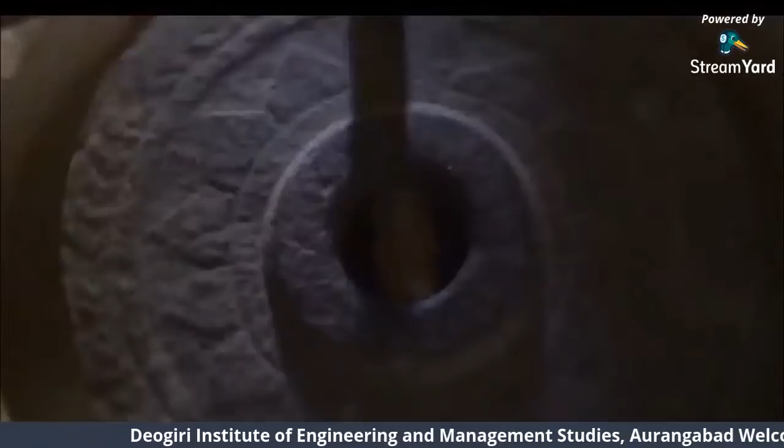The Anand Group. As India's leading auto component manufacturer, we power just about every type of motor vehicle - cars, commercial vehicles, off-highway vehicles, two-wheelers, and even trains that run in India.

There is an ever-growing demand for stringent quality norms from our key customers. The customer expectation, along with a strong competitive environment, has brought in the need to attain and sustain world-class quality levels.

Mr. Deep C. Anand, the founder of Anand, firmly believed in the ethos that in order to be the best, you have to work with the best. The group's journey of partnerships began with Gabriel in 1961. Over the past 6 decades, Anand companies have successfully integrated the technical expertise of its joint venture partners into local operations, creating win-wins for both our customers and our companies. Today, the Anand name is synonymous with trust, innovation, and quality.

With its wide range of solutions for the Indian automotive market, Anand companies provide a range of brands and products that are simply world-class.

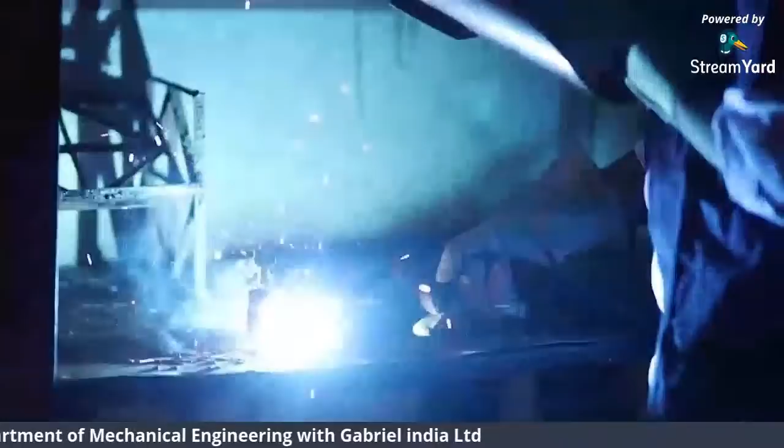It also offers 6 months of industrial training in the final year, enabling students to develop knowledge as per industrial requirements. The institute offers BTech and MTech courses in various disciplines like mechanical engineering, electronics and telecommunication engineering, civil engineering, computer science and engineering, as well as a master's in business administration.

Leaders become great not because of their power, but because of their ability to empower others.

Creative learning, personal attention, individual counseling, and valuable guidance open up a world of new ideas, which infuse the motivated students and staff with positive energy and creative thoughts.

This can be expressed as a unique equation: DIEMS is equal to discipline plus academics plus placements.

Why DIEMS? There are more than 40 spacious and well-ventilated classrooms which provide a healthy environment for innovative classroom learning.

More than 60 well-equipped laboratories with best-in-class equipment meet not only the requirements of the syllabi, but are also intended to give practical experience to students. The students here enjoy the fun of performing various scientific experiments. Playing with various circuit components and seeing how they work in real time is the best way to learn. Competent teachers demonstrate the experiments in the labs, and the students get opportunities to explore inside and beyond the classrooms.

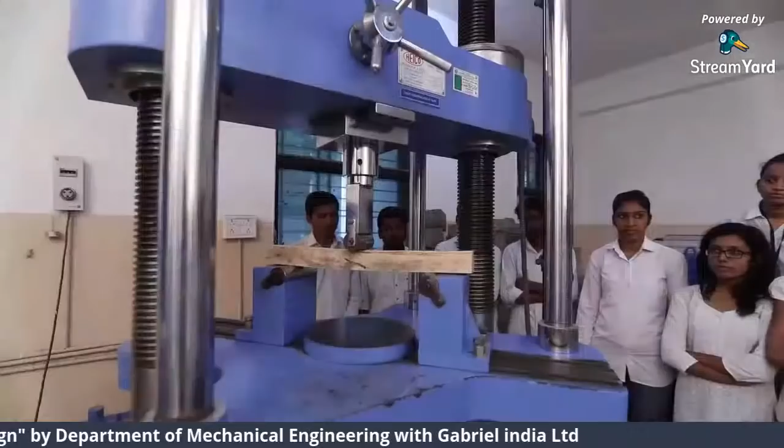These labs provide the facilities for performing practicals on the related concepts of each subject. There are updated software and equipment for the different subjects. Here, the future engineers experiment with, test and prove theorems. Every laboratory aims to prepare students with the knowledge and ability to improve, evaluate, design and control sustainable and cost-effective technologies in order to make innovative and useful contributions to humanity.

In order to ensure that students are well aware of the required industrial standards, not just theoretically but also in practice, we at DIEMS have a fully equipped central workshop. Here, the students are not only informed about the various stages in the making of a job, but they also get a chance to perform all these jobs on the shop floor.

The students complete their projects in the workshop for vehicle manufacturing and assembling of parts. Here, we make sure that our future engineers never miss out on the finest details regarding the various elements of manufacturing.

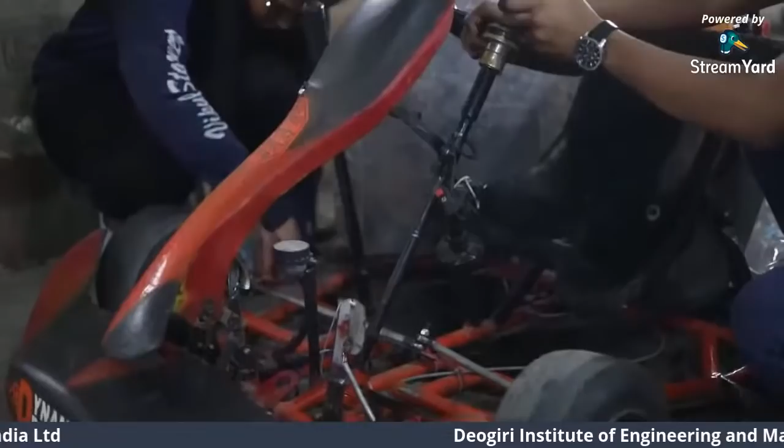The Institute's library is enveloped in a serene atmosphere. It has a spacious reading room and serves the students and faculty with more than 30,000 reference books, periodicals, magazines, newspapers, and journals. Our digital library provides the students with online books and e-journals, articles, video lectures, manuals, and many more. It also provides updates, study material, and databases on a large scale, all of which support the academic curriculum of students.

Our students enjoy the facility of an elegant seminar hall for conducting guest lectures, training programs, and technical events. The spacious conference room is outfitted with presentation technology for conducting conferences, meetings, and presentations. To meet the requirement of activity-based programs, short-term training programs, and technical workshops, 2 distinct seminar halls have been provided.

Understanding the dynamics of industrial expectation at the national and international levels, this year the students have been trained by companies like TCS, TechRel and Barclays. The highest number of job offers was achieved in 2019, with offers from companies like Byju's, Wipro Technologies, Reliance Jio, Atlas Copco India Ltd, Dhoot Transmission, Jaro Education, Hire, Syntel and many others. The highest compensation package offered was 9 lakh rupees per annum.

The girls as well as boys hostels of DIEMS is located in a safe and secure campus, and it is indeed a new home away from home. Strict rules are followed and discipline is not compromised. The mess is a great place where food is cooked to perfection and where the homemade flavors, tastes and affordable prices are a hit with the hostelites.

The canteen is the favorite place for students to relax from their hectic schedules. It is also the best place for students to mingle in groups.

We encourage our students to excel not just in academics but also in sports. Situated in the center of our campus is a vast, lush green playground where students can bring out the athlete in them.

Under the NSS activity, the students take concrete steps to discharge their social responsibility by performing various activities like organizing tree plantation drives and blood donation camps, check dam construction, and conducting street plays. The institute has also adopted a village, Sultanpur, under this initiative and is educating the local people every year about critical subjects like water conservation, environmental awareness, and child education.

The college frequently takes the students on industrial visits to various companies with the objective of providing them exposure to real-world problems and inculcate a practical approach. More than 500 industrial visits have been arranged so far.

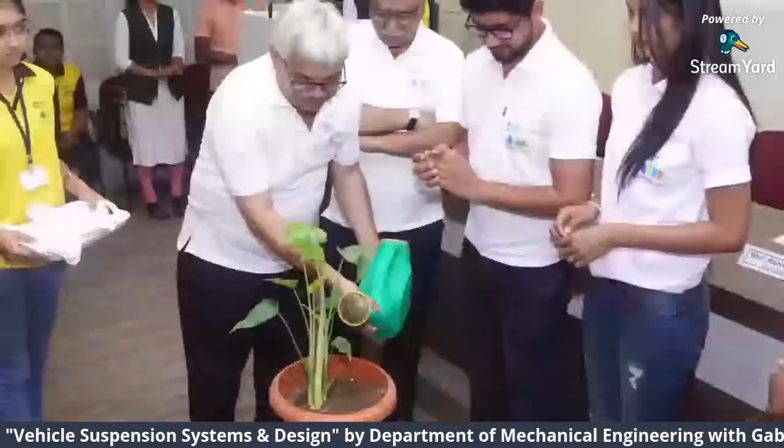The Red Hat Academy helps students differentiate themselves by providing enterprise-ready Linux and open-source advanced training, which develops in-demand skills. More than 150 students have been certified so far, and more than 50 students have got jobs in open-source technologies.

Recently, the Institute had organized the flagship 4th International Conference on Computing in Engineering and Technology. Here, researchers, engineers and scientists from around the world participated and presented their research papers, which were published in the AISC series of Springer. The Institute is well known for its dazzling academic records.

The students have brought glory to the Institute with consistent performances in the university exams by securing top ranks in the merit list and setting new benchmarks every year. We have excelled with flying colors in technical events as well.

Team Dynamic Boosters won the General Championship in the Student Kart Design Challenge Season 2, held at Hyderabad, and also stood second runner-up in the Bharat Formula National Level Go-Kart Championship held at Coimbatore in March 2019.

The all-girls team Tejaswini got the Best Cost-Effective Report Award and Visionary Award in the Saur Urja Vehicle Challenge held in March 2019. Recently, Team Bhumiputra won the Best Innovation Award for the Onion Harvester in the event TIFAN organized by SAE India.

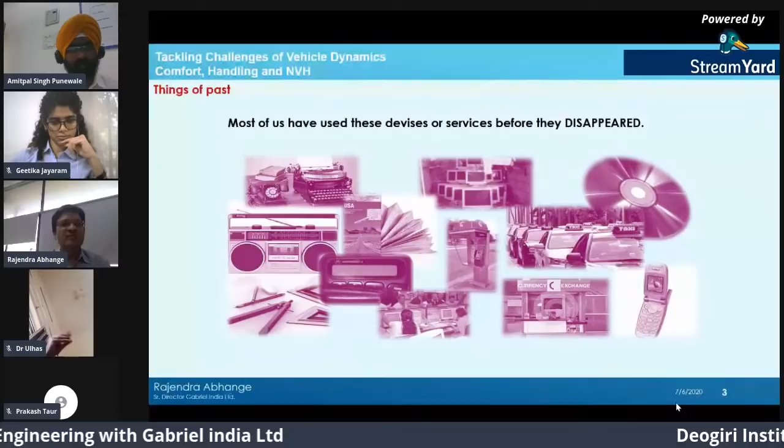It's always my pleasure to be amongst the young students, because whenever I am with you, I believe you have a large audience today. I'm not going to talk about shock absorbers. I'm going to talk about what revolves around shock absorbers for the next 5 to 7 minutes before I hand over to my young team, Ajay and others, who are already here and will take over in a few minutes.

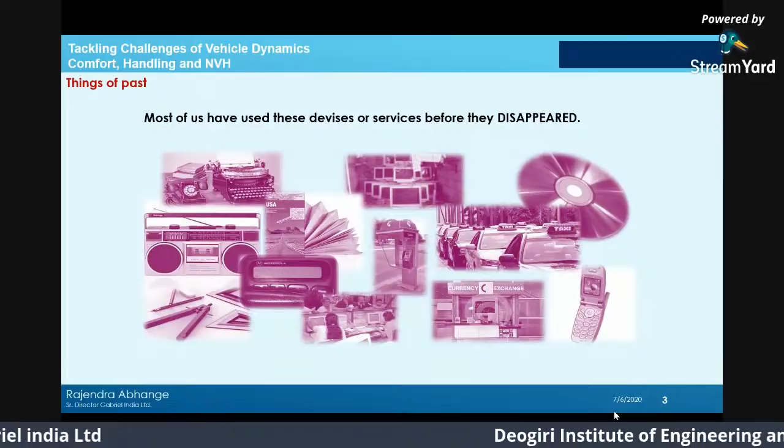I want to take you to a little past history. Most of these gadgets we would have used in our lifetime, but today they don't exist anymore. So what has happened all of a sudden? Have you stopped listening to music? Have you stopped getting documents printed? Are you not talking on telephones or mobile phones anymore? But something has happened.

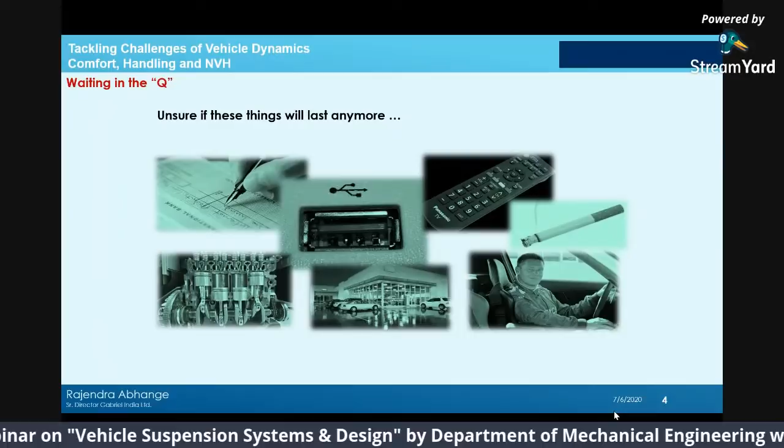Here are some of the devices or services that are likely to not be there, including services like drivers. You may not have the driver. Cigarettes may not exist. Engines may vanish. We all were born with engines, you know. We studied - I am a mechanical engineer from Government Engineering College, Aurangabad, and engines were my favorite topic. But today we are talking about engines vanishing. What an amazing thing. So all these things are going to happen.

So what is behind all this is that when things get obsolete, first of all, there is nothing eternal. There is nothing forever on this planet. Everything has a life. Most of the time, when products are unable to provide an attractiveness in cost-value relationship compared to other options, the product vanishes. For example, the cassette player - it was not able to provide the cost-value relationship compared to the new generation of listening to music.

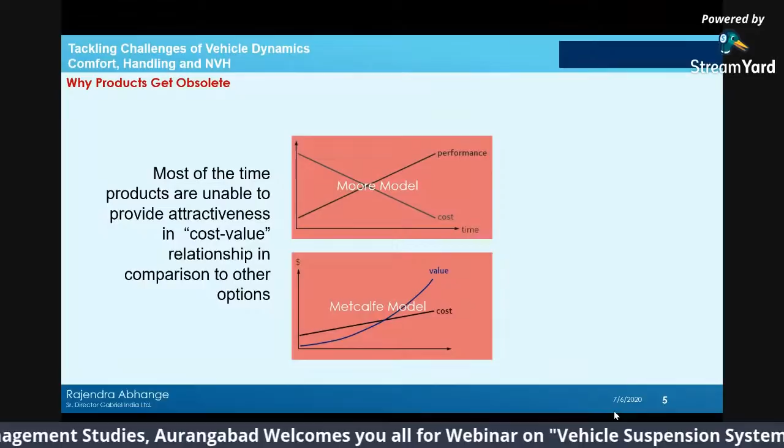First FM came, then CD players came, then iPods came, and now everything is gone and everything is in your mobile. Smartphones came. So things don't remain forever, but the way you use things changes. That, in economic language, is called the cost-value relationship.

Moore is one of the scientists, and Metcalfe is another, who put forward two theories: that if you are continuously enhancing the performance of your product linearly, the cost has to go down linearly. It's a very radical thinking, isn't it? Normally you go to the market and ask for something superior, a better shirt, and they say it's going to cost you more. But Moore said, if you want to stay alive in the marketplace, you have to enhance performance while reducing cost continuously, and the relationship has to be linear upward and linear downward.

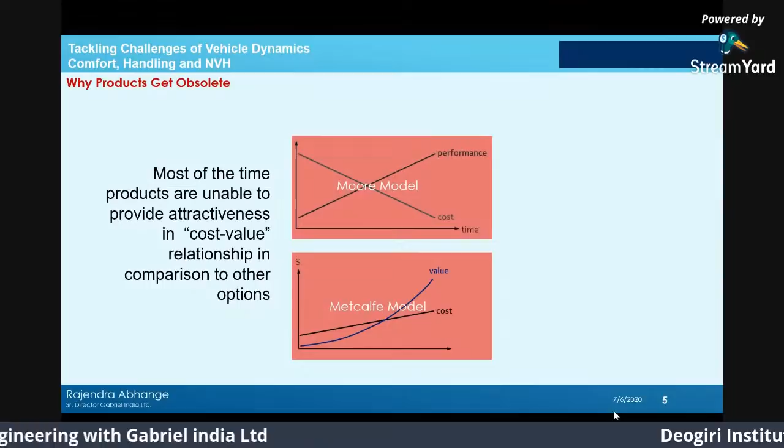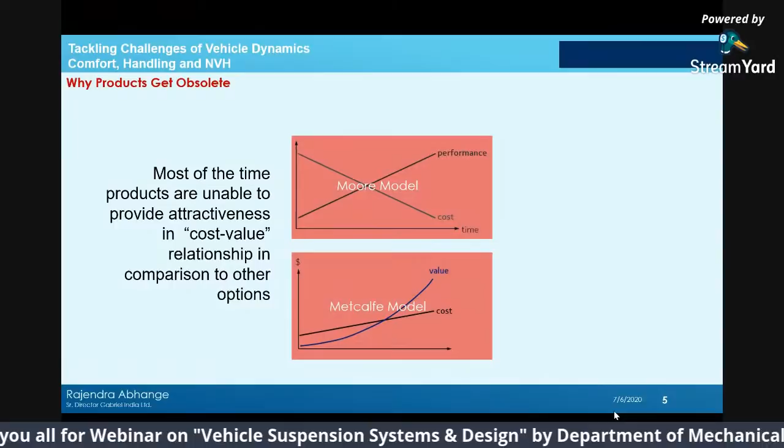On the other hand, Metcalfe brought another model - that it's okay if sometimes the cost of the product goes up, but then the value has to go up exponentially high. Then you stand a chance to survive. Gabriel has been following these models for over 5 or 6 decades now, and that's why we are the oldest company in India that still survives in shock absorbers. Otherwise, many companies have come and gone. We stay alive because we follow both the Moore model and Metcalfe's model in our business, so that our products are continuously demanded by the market and don't get obsolete.

Another topic - this is a chart from IBM, showing data for the last 10 years. It's available on the net, showing the external forces that are going to impact our industry. Technology continues to be one of the major topics that impacts the industry, but look at the other indicators. Sustainability was only 33% as an index in 2008, and has gone up to 60%.

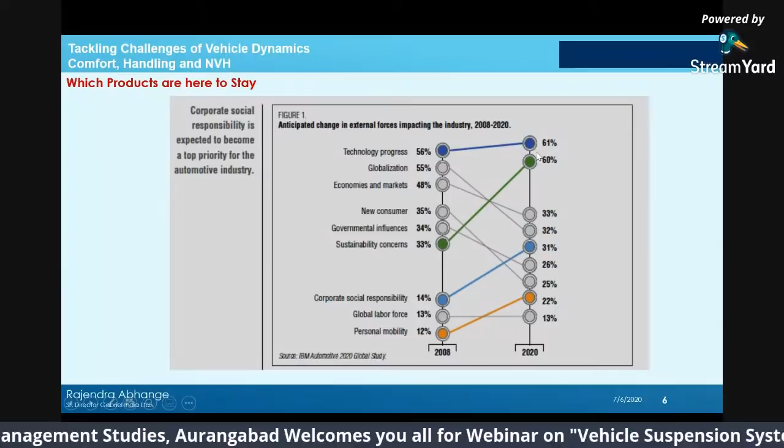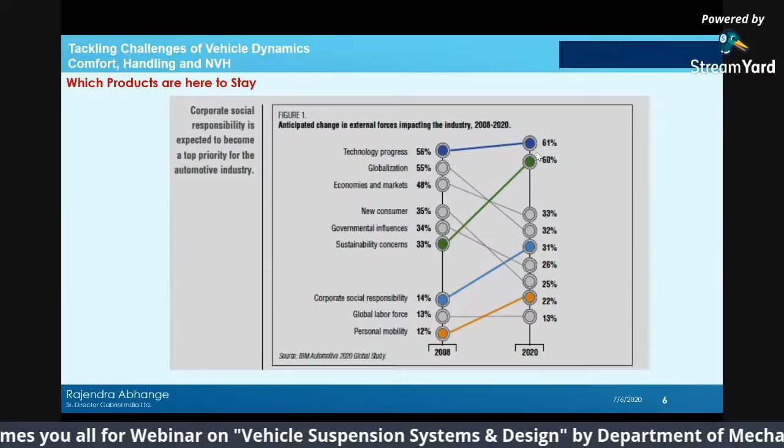That all means carbon footprint, reduction of weight, reduction of wastages, reduction of poisonous emissions - everything counts in the future. If your products are associated with these kinds of hazards, believe me, your business, your products will not exist anymore. Why has BS6 come? Everything that was produced in BS4 is no longer possible to sell. There are trucks and cars lying in the yards with dealers who do not have buyers because they do not meet the new BS6 norms. So remember, in any business or service you are in, if you are not able to handle the sustainability concerns, your product is under threat.

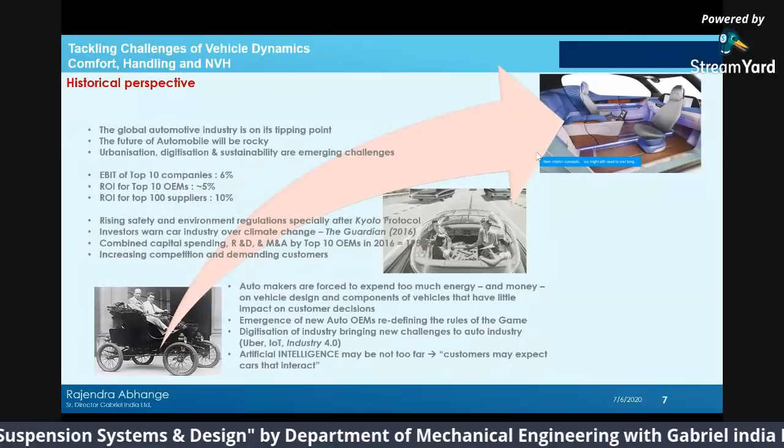Automobiles have evolved over the years, right from the first automobile in 1905 and 1908. The first automobiles were built and Ford did mass production of that. From that time to today, there is a huge change. In those years, people preferred horses over automobiles because automobiles were a bigger problem - they were not fast enough and consumed a lot of fuel, not very economical. Horses were very handy, they would go to any nook and corner. So people said this automobile is a useless thing to have, and horse is a better thing to have.

But today you see where we stand, and looking at the way forward, you will see a future which will not have a steering wheel, which will have nothing inside - just like you're sitting in your living room or bedroom. You will have all the gadgets because cars will be driverless. I just got a call last week from an old colleague in Silicon Valley - there is a company called Nuro that has already got a license for a delivery truck which is driverless, has no driver, and can run on the normal road. So these are some of the disruptions happening around us, and we have to be a part of this disruption.

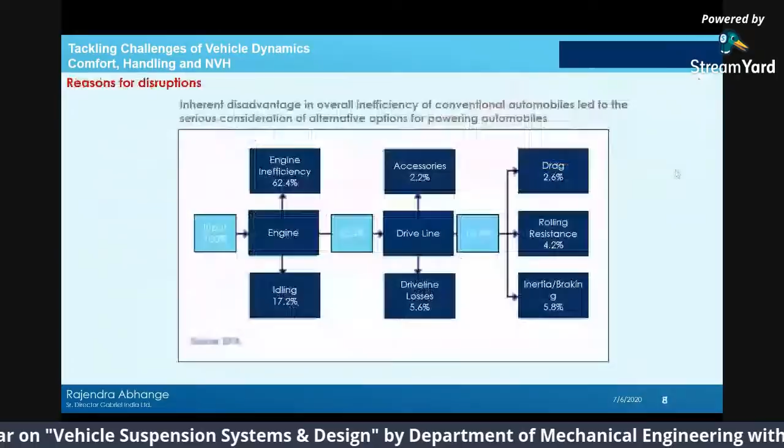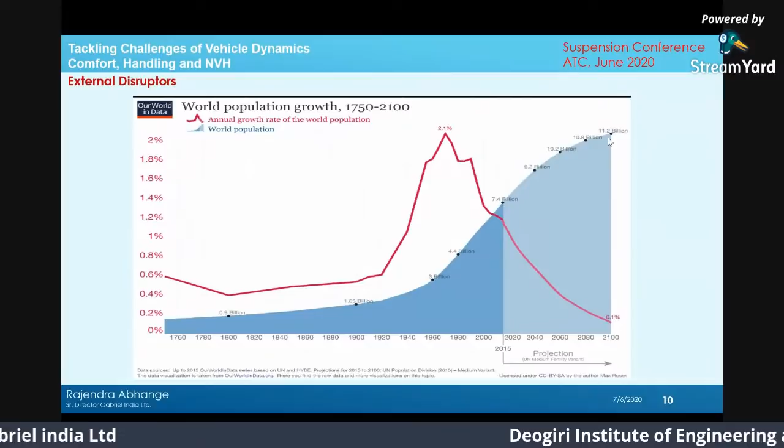Also remember that the world's aging population is continuously growing, so the demand is going to continuously grow. Today we are at 8 billion - sorry, I'm showing a wrong slide - today we are somewhere around 7.4 billion, by 2020. This population by the end of the century will be 11 billion. Obviously the demand will be more, and the consumption of everything we produce on this planet is going to go up.

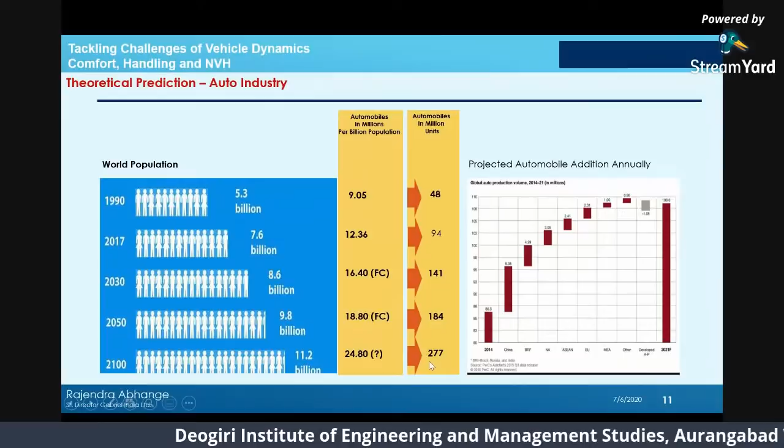Also the automobile requirement is going to go up. India currently has only 30 cars per 1,000 people, or less. China has 150, America has 800. So if we are able to get even to the level of China, around 150, India's roads will burst with automobiles. There will be no roads to travel, there will be no roads to park the car.

So all these disruptions happening around us, including the mobility index - the global mobility index is going to be another topic where people would like to have more mobility options. Like in Aurangabad, you only have city buses and auto rickshaws, you don't have so many Ubers, trams, or metros, so your mobility index will fall very low on this scale. But cities like Stockholm, Amsterdam, Hong Kong have multiple ways - in Hong Kong you can go by ferry, tram, sky train, metro, or drive. There are n number of options to commute these distances. So the global mobility index is also going to be a huge topic which is going to disrupt the entire auto industry.

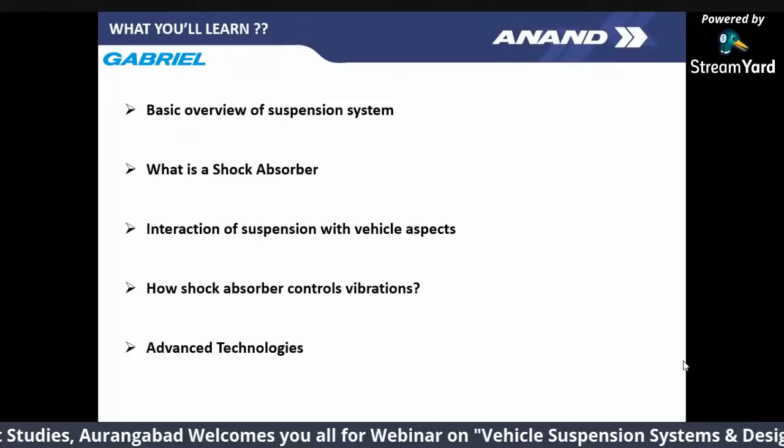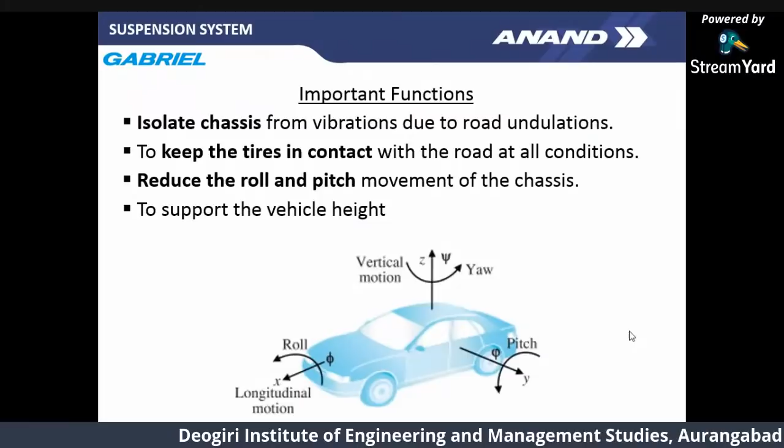What are the important functions of the suspension system? The main function is to isolate the chassis from the vibrations which come onto it due to road undulations. Next, to keep the tires in contact with the road at all running conditions, to reduce the roll and pitch movement of the chassis, and to support the vehicle height at all conditions.

What are the different types of suspension system?

Next, moving on to independent suspension. In independent suspension, each wheel can move independently of the other. Their motion does not depend on the adjacent wheel. This independent suspension improves the vehicle's ride control as well as comfort.

The most commonly used types of independent suspension in four-wheelers are Macpherson Strut and double wishbone type of suspension. It is needless to say that in two-wheelers, both wheels move independent of each other, hence it is also an independent type of suspension.

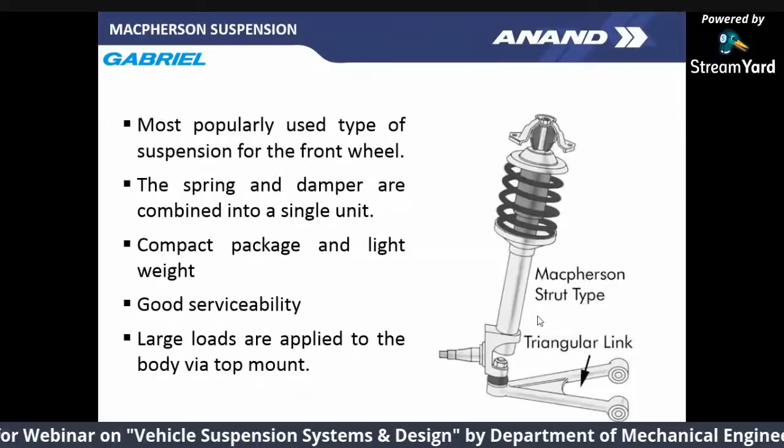So moving on to the most popularly used type of suspension in the front wheel of a four-wheeler: the Macpherson Strut. In this, as you can see in the figure, the damper as well as the spring are combined into one single unit. As both are combined together, the package is very compact and light in weight. As there are fewer parts, you only have the triangular link, which is the lower control arm, and the Macpherson strut present. It gives you good serviceability.

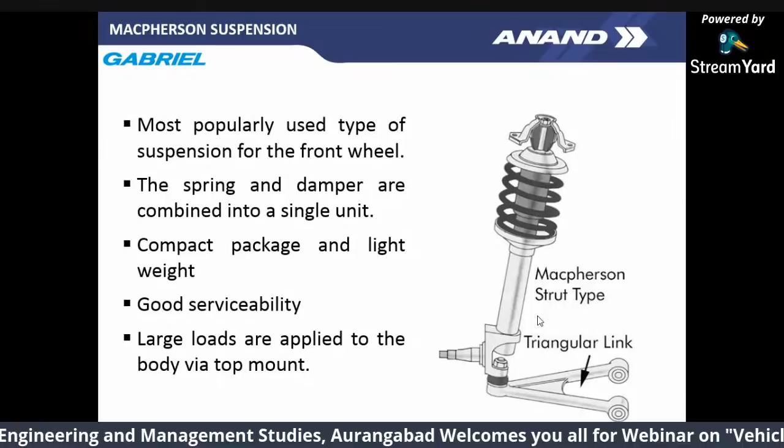In double wishbone type of suspension, there is another wishbone present just to carry the loads. In the McPherson strut case, that is absent, so the strut itself becomes a load carrying member. Hence, large loads are applied on the body via the top mount of the strut.

Next is the double wishbone type of suspension. Here, as you can see, there are two wishbones, the upper and the lower one. The damper is connected to the lower wishbone, and this is connected to the chassis at four points. Here also, the spring and damper are combined together into one compact unit.

But as you can see, there are more parts. Hence, the replacement and service costs are high. It's more complex in shape and higher in weight as well compared to the McPherson Strut.

If we go on to two-wheelers, in front suspension, you have the telescopic front fork. It is the most commonly used type of front suspension in two-wheelers. It contains the damper and the spring packed as one single unit. Most of its advantages are that it is very simple in design, easy to manufacture and assemble, and lighter than the older designs used in two-wheeler front suspension, which consisted of many linkages and external components.

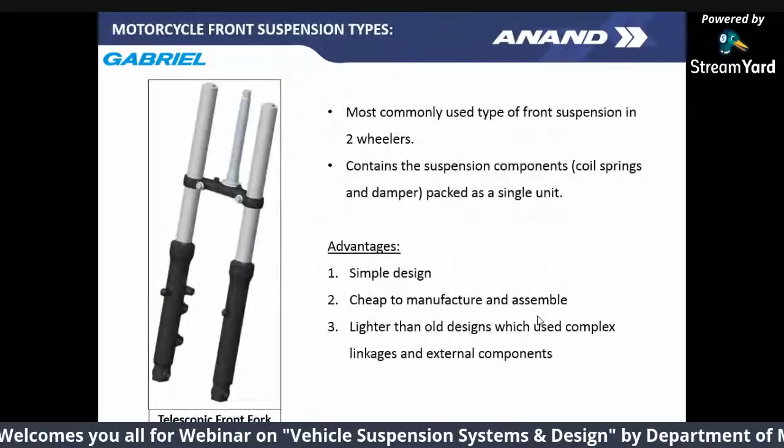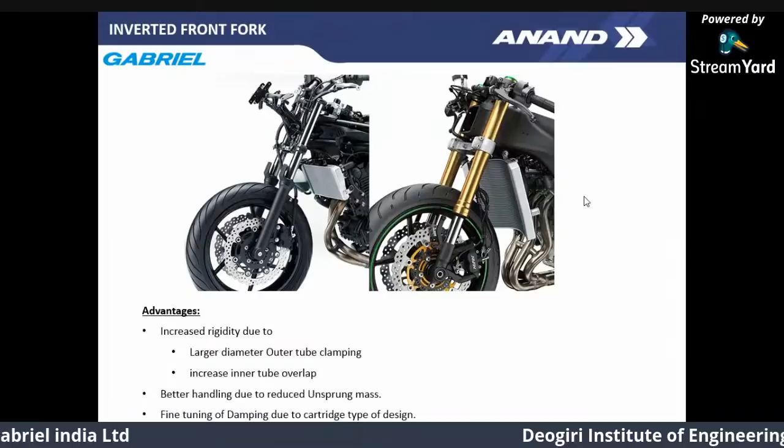We will get to the concepts of unsprung mass and sprung mass and their effect on the vehicle in later stages, as well as fine tuning of damping due to cartridge type of design.

Now you could see that in all cases, the shock absorber was common. So what is the shock absorber exactly? It is a hydraulic pump-like device, mainly used to control the impact and rebound movement of the vehicle. The key role of the shock absorber, as with the suspension as a whole, is to maintain the vehicle's tire always in contact with the road. This ensures the safest control and braking response from your car.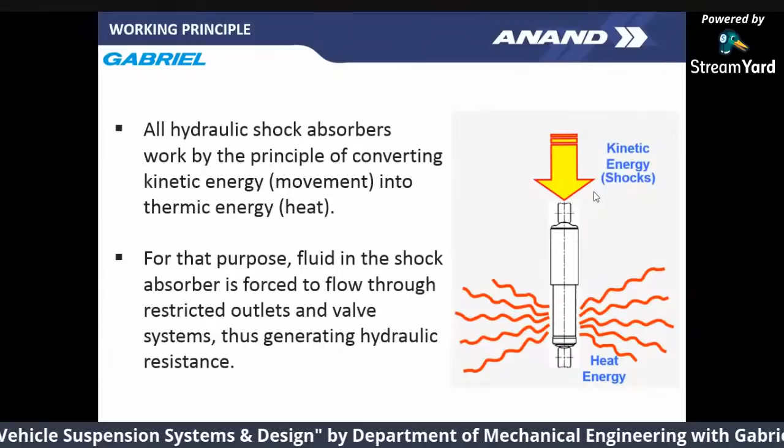What is the basic principle behind the working of the shock absorber? As the vehicle moves on a road, the shock absorber gets compressed or extended due to any undulations on the road. This, in the form of kinetic energy, gets converted into thermal energy inside the shock absorber. For this purpose, the fluid present inside the shock absorber is forced to flow through restricted outlets and valve systems, thus creating hydraulic resistance.

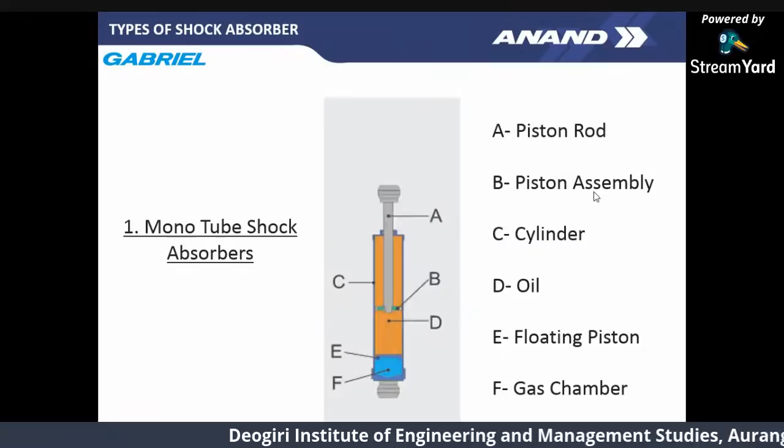So what are the different types of shock absorbers? The first type is the monotube shock absorber. Here you have a piston rod, a piston, and an oil chamber. Then you have a floating piston, denoted as E, and a gas chamber. So here you only have one single tube carrying the entire oil. You have two strokes, the compression stroke and the extension stroke, both controlled by the piston itself. The gas chamber is present for compensating the oil flow and for better response of the shock absorber.

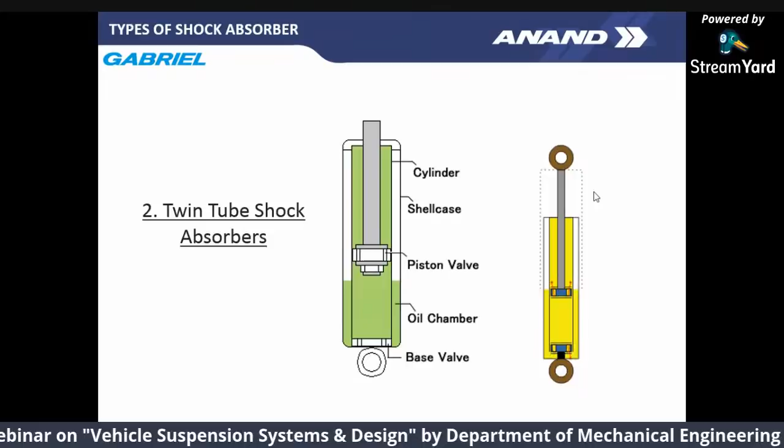Next comes the twin tube shock absorber. Here you have two different oil chambers, so you have two tubes, the inner tube and the outer tube. The remaining components, the piston valve and the piston rod, remain the same. As there are two tubes present, you have an additional component named the base valve. In the previous case, the piston itself controls the extension and compression stroke. Here, the piston controls the extension stroke, whereas the compression stroke is controlled by the base valve.

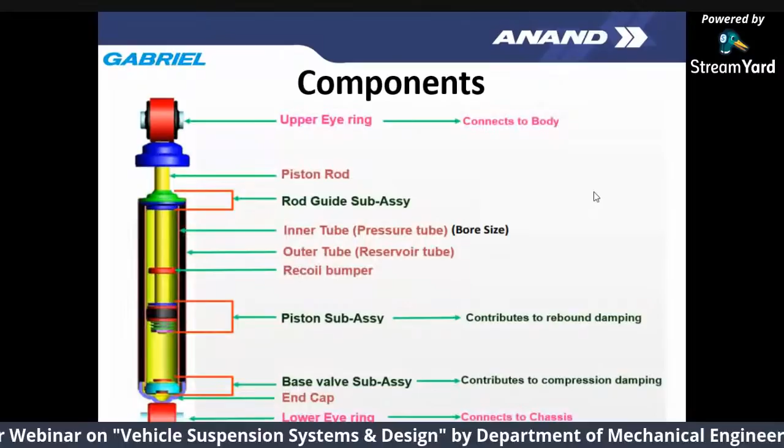So what are the basic components of the shock absorber? You have the mountings, which is the upper eye ring and the lower eye ring, the piston rod, the rod guide subassembly, the inner tube, outer tube, the piston subassembly and the base valve subassembly, and a recoil bumper. A recoil bumper is basically used to avoid metal to metal contact during full extension.

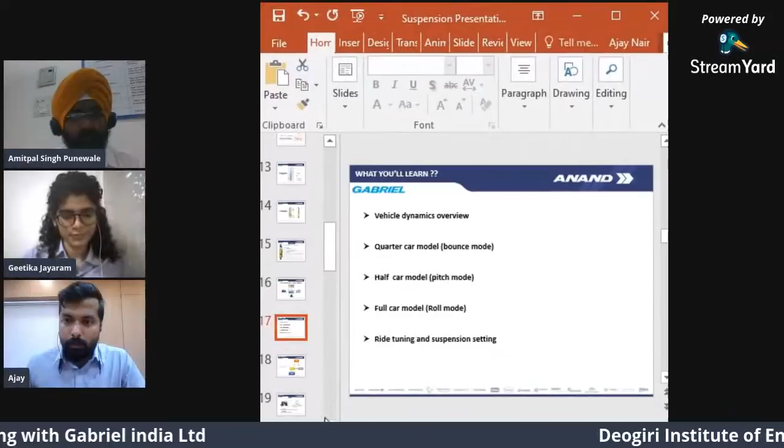So Ajay, over to you. Thank you, Geetika. Yes, sir. It was a wonderful presentation on the basics of suspension. Now we'll move on.

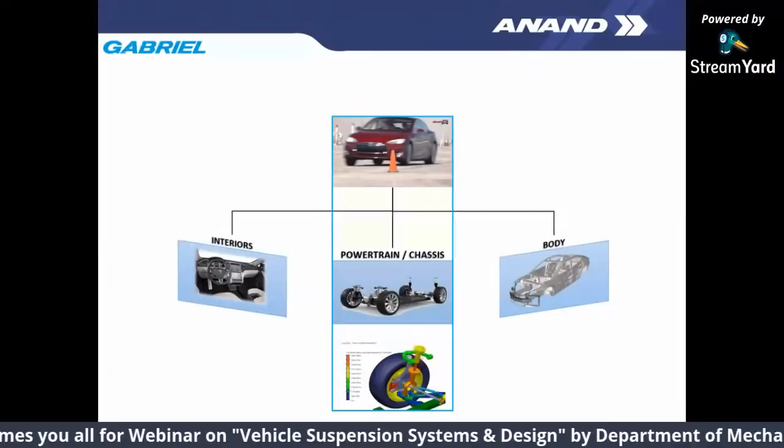Sorry, I just moved a bit quicker. Okay. So in the past session, we understood what a suspension does and the basic working principle of a shock absorber, and what are the different... Yes, sir. The presentation is not looking properly. Now it is visible, go to presentation mode now. Okay, is it so? No, not clear, not visible. Just a second, while going in, start the presentation from the beginning and then move to this slide. Okay, right. Share again please, sir. Yeah, I'm just sharing it. Is it visible now? Yes, sir, now it is visible. Okay, thanks for that.

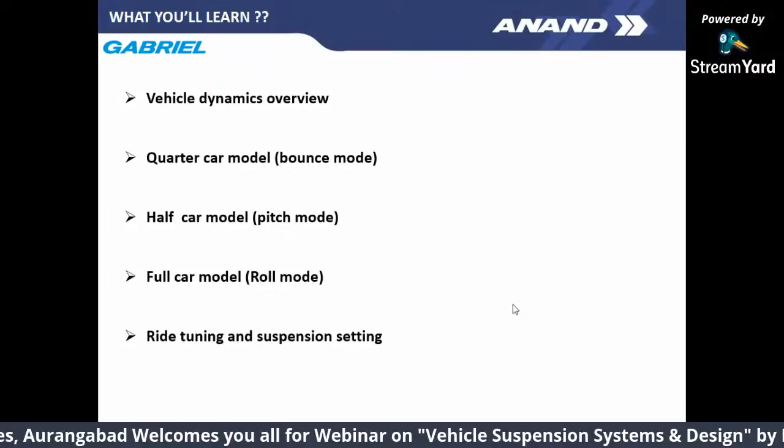In the last session, we understood what a shock absorber does, the working principle of a shock absorber, and the different types of shock absorbers across the industry. In this session, we'll try to understand the role of suspension in vehicle dynamics. This is the overview of what we're going to learn in this session: starting with a vehicle dynamics overview, moving to a quarter car model, then a half car model, followed by a full car model, and finishing with ride tuning and how suspension tuning is done in general practice.

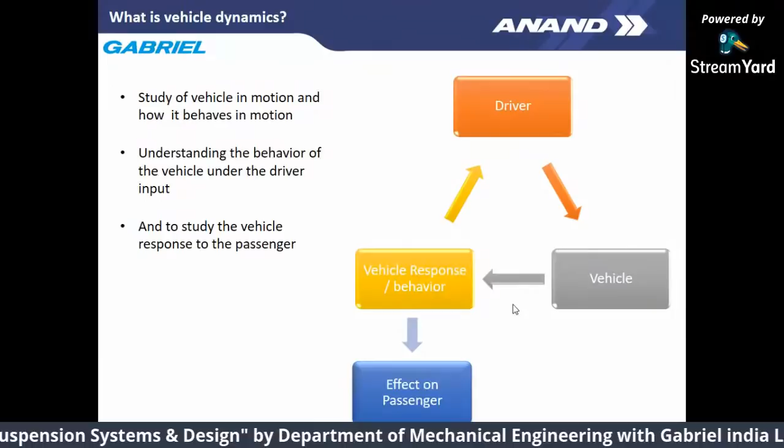When we talk about vehicle dynamics, one should understand what vehicle dynamics is. The vehicle is a mass which is moving along a surface. So the vehicle dynamics term itself deals with how to control the mass in motion with respect to the boundary condition consideration of the driver input and the road surfaces.

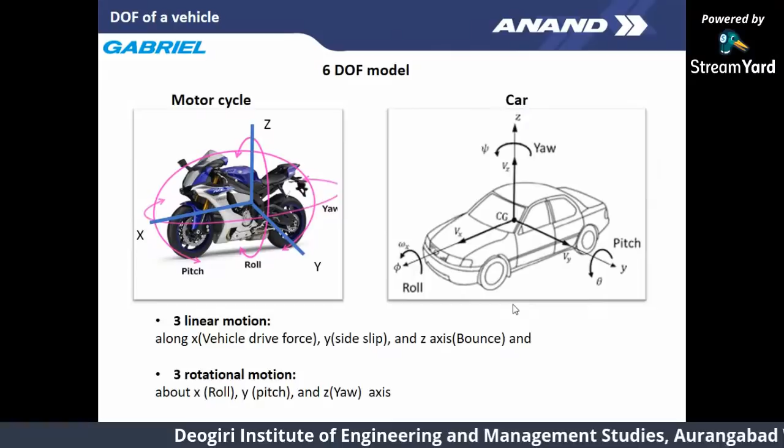Now, when we say vehicle dynamics, it's associated with motion. We should understand the degrees of freedom, because to have motion, you should have degrees of freedom on the vehicle. We consider a 6 degrees of freedom model as a basic version, which remains the same for both two-wheeler and four-wheeler: 3 linear motions along X, Y and Z, and 3 rotational motions along X, Y, and Z. We'll look into detail on the following slides.

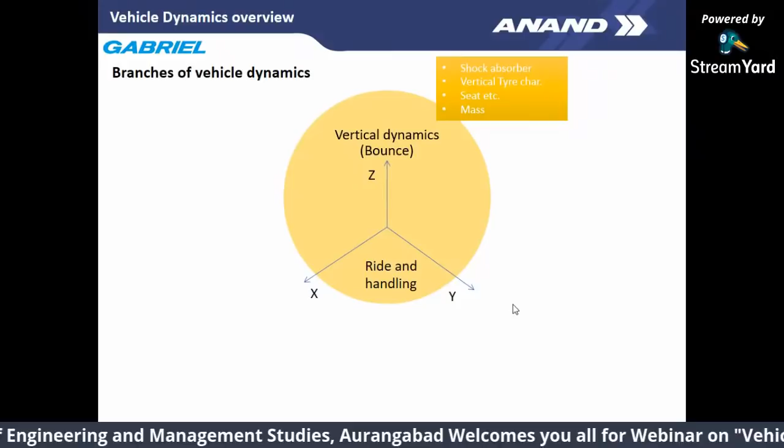So how are vehicle dynamics classified with respect to the axis system? What about the motion along the Z axis? We call it the vertical plane, classified as vertical dynamics, and the components controlling vertical dynamics are shock absorber, sprung mass, seat, and vertical tire characteristics, etc. Then it comes to the lateral direction, along Y, classified as lateral dynamics, where suspension geometry, steering geometry, vehicle layout, center of gravity, roll center, etc. come into play.

This contributes to deciding the lateral dynamics characteristics. Similarly, along the vehicle, on the X-axis, whatever dynamics are considered is called longitudinal dynamics, which includes power transmission, braking, center of gravity position, X-axis, and wheelbase, etc.

From this slide, it's clear that the shock absorber majorly contributes to the vertical plane, or vertical dynamics, and 3 degrees of freedom are controlled mainly by the shock absorber: bounce, roll, and pitch. In upcoming slides, we'll look at how these 3 modes are controlled by a shock absorber system.

We'll start with the vertical mode, which is the bounce mode. To understand that better, we should understand what a quarter car model is.

In a quarter car model, there are typically 4 components: sprung mass, illustrated as MB, unsprung mass, illustrated as MW, a spring, and a damper system. The sprung mass is all the mass above the spring, including the passenger and driver mass, the vehicle mass itself, and a portion of the shock absorber mass. The unsprung mass includes the wheel assembly mass, a portion of the suspension and swing arm, and the brake assembly units. Then the other 2 components are the spring and damper.

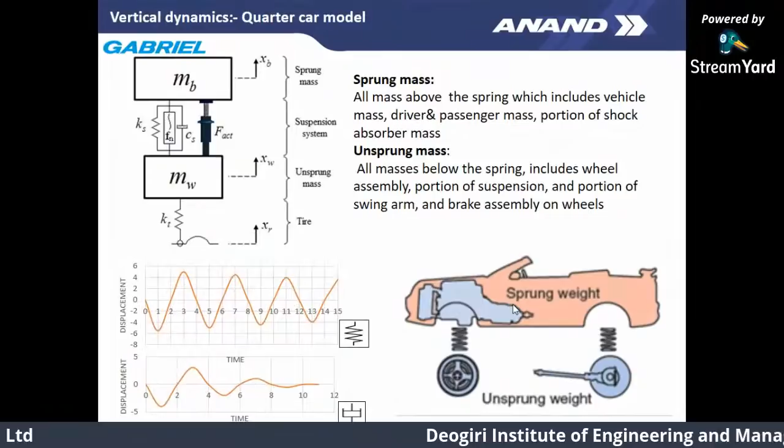Now let us consider a real life scenario: a wheel with a mass upon it, going to face a hump. Let's consider the first scenario where there is no spring and no damper. Look at the green line, which is the traction point of the tire, and the red line, which is the center of mass moving with respect to the tire movement. You can clearly see there are 3 things mentioned here.

The moment it hits the obstacle, the wheel goes upward, and in the same fashion, the sprung mass also goes upward, or the slope is very steep, causing a high acceleration level on the vertical plane, which causes a very fast, harsh ride. But that is not the end of it.

On the back side of the bump, the green line has a gap from the bump profile, meaning there is severe loss of traction on the back of the bump when a mass with no suspension system hits the bump. Also, after the wheel lands on the ground, there are uncontrolled oscillations on both sprung mass and unsprung mass.

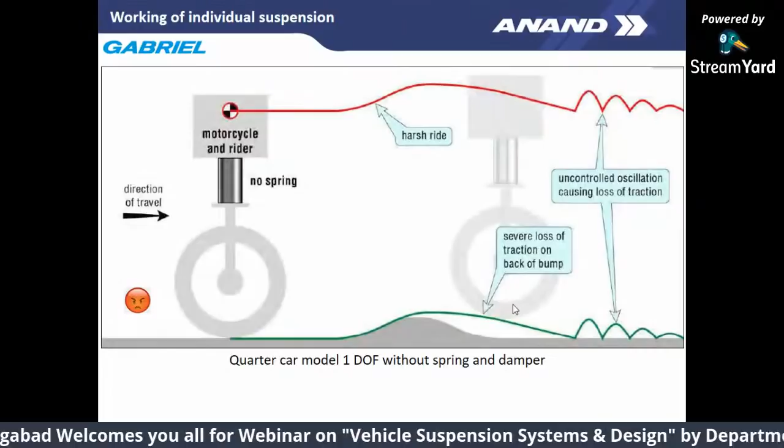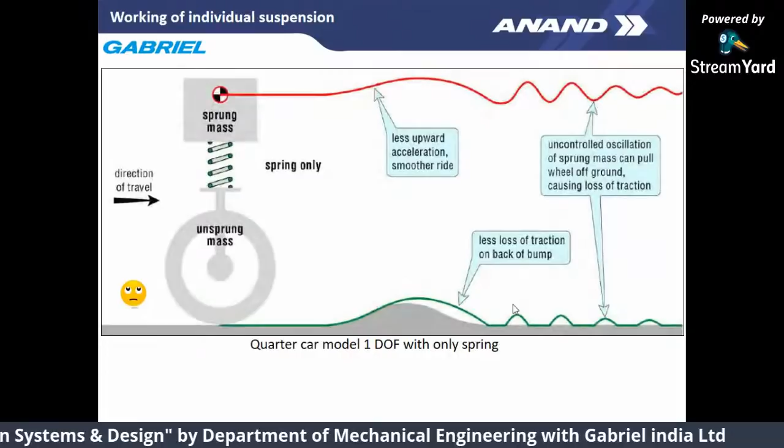Now let's understand the second scenario, where I'm just putting a spring into the system. Now we can clearly say it's a sprung mass system, with a mass on the spring and unsprung mass below. The difference is that the moment you hit the bump, the upward acceleration movement has been smoothened, so you don't feel such a harsh ride during the hit. But still, the traction is not so good on the back of the bump, and there are uncontrolled oscillations.

Now let's see the third scenario, where there is a spring and damper system in place. This is the perfect requirement of a spring-damper system, where traction is maximized and the smoothest ride can be obtained.

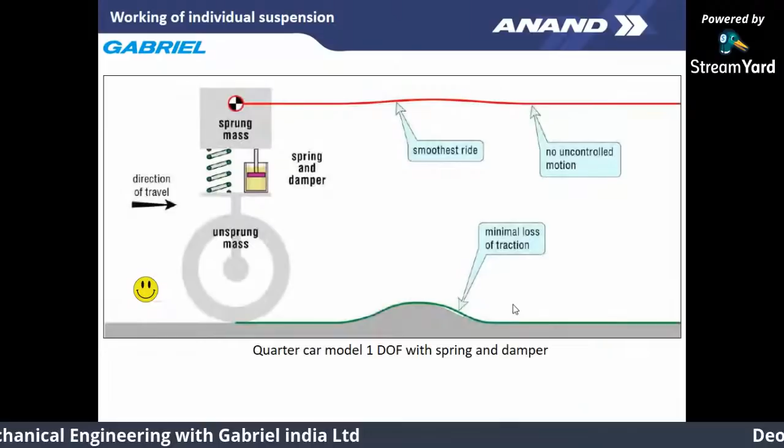But the question is, is this possible in a real life scenario? Actually, no, with a passive suspension system, because the suspension is not designed only for the vertical plane; it also contributes to other motions and degrees of freedom. So there will always be a trade-off with other characteristics. In real life, we may not get the smoothest ride as in an ideal passive system, but with an active system, yes, you will get a similar result.

Okay, now we are done with the quarter car model. We have to move on to the half car model, where we'll understand the pitching motion. When it comes to pitching motion, generally all suspension designers will be facing a problem of synchronization. Before that, we'll understand what a half car model is. You have a two-wheel assembly and two suspension systems, front and rear, and the sprung mass is connected to both.

In this scenario, the front wheel will be hitting a bump first and the rear will be hitting the bump second. When the synchronization is not good, even after leaving the bump track, you will be feeling the front and rear pitching motion, which is not in sync.

To get the sync back, generally what designers do is increase the rear stiffness of the suspension, or rather we say the ride frequencies will be increased by 10 to 20% compared to the front, so that you get a flat ride after the bump.

Another pitching motion we'll be discussing here is squat. Squat is nothing but the load transfer from front to rear when the vehicle is accelerating. This generally happens when you have a very high level of acceleration on the vehicle.

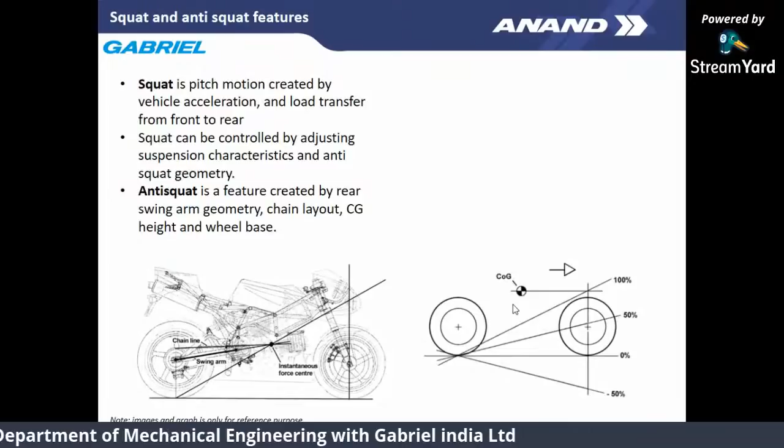The squat can be controlled by adjusting suspension characteristics and anti-squat geometry. Increasing rear suspension stiffness will help you reduce the squat, and also introducing an anti-squat feature, which is demonstrated as a diagram here, will also help you. It's a feature created by the rear swing geometry, chain layout, center of gravity height, and wheelbase.

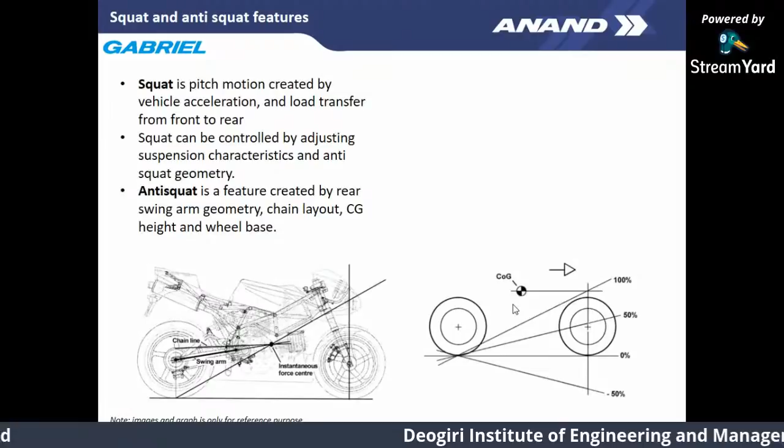Having a good amount of anti-squat, like say 100%, you will have less load transfer to the rear, and thus you can reduce the squat. But some people will be using squat as a required feature for those who do stunts, like wheelies.

Now we'll go into another pitch motion called dive. Dive is opposite to the squat, where the front will be loaded and the rear will be unloaded. This generally happens when you do braking.

Anti-dive is the thing which you can use for controlling the dive feature. There were linkage mechanisms used in earlier scenarios to control the dive, but the telescopic front fork we use in real life or the current scenario has pro-dive characteristics, or in other words, it has negative anti-dive characteristics. This is generally used to have a better braking force.

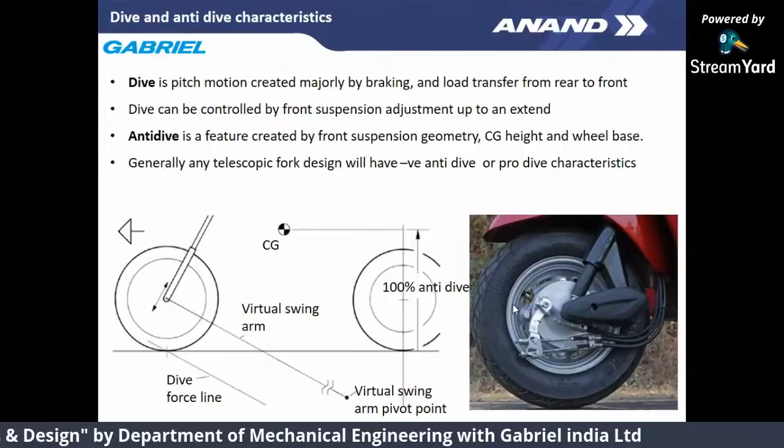Now we are done with the half car model or motorcycle model. Now we'll go into the full car model or four-wheel model, where roll comes into the picture. The roll is nothing but created by the rolling moment, and the higher the roll angle, the higher the incidence of rollover.

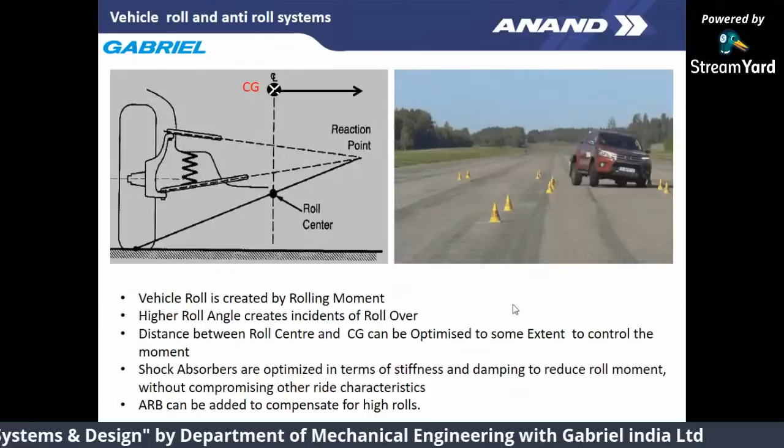So to control the roll motion, generally we might have to optimize the distance between the roll center and the CG, and the shock absorber. Increasing the shock absorber stiffness will also get you some torsional stiffness, which will control the roll. And the final answer for roll control will be an anti-roll bar. This is a typical example of how roll happens on a four-wheeler.

Okay, we are done with the vehicle dynamics theory. Now let us understand some practical applications of it.

Generally, we set the suspension by design, and there will be a testing phase of it, and most industries follow the same procedure. This is called ride tuning and suspension setting phase.

So before going to the ride tuning, we should understand two important things. One of it is what is expected - what should be the expectation from the suspension tuning. The first point is you should be able to define the requirement of ride and handling characteristics of your vehicle, because each type of vehicle will have its own different kind of ride and handling characteristics.

There is a methodology of suspension tuning. The general practice involves two types of suspension tuning: one is subjective testing and the other is objective evaluation.

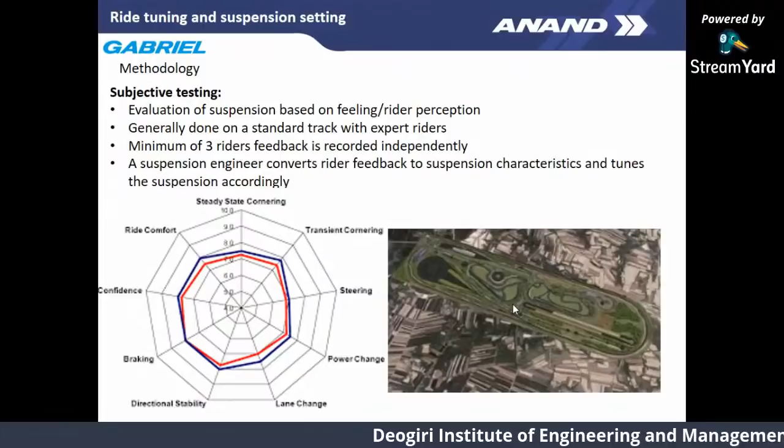A typical output of a ride tuning activity is this chart, called a web chart or radar chart. Here, all the ride and handling requirements are listed on the axes and rated on a scale of 1 to 10 or 1 to 5.

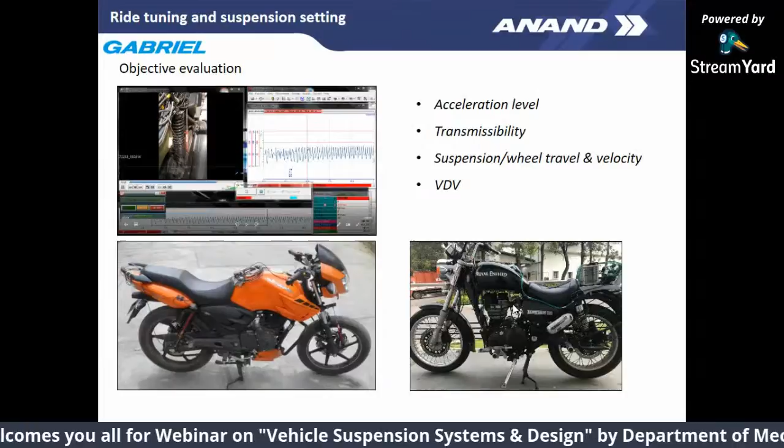Coming to objective evaluation: now we talk about feeling in subjective testing. In objective evaluation, we deal with objective values, generally obtained through an instrumentation study. These values characterize ride and handling using objective measures. Some examples are acceleration level in terms of RMS Gs, transmissibility, suspension and wheel travel, and VDV (vibration dose value). All these define ride characteristics, and there are similar parameters for handling as well.

So that concludes the vehicle dynamics explanation. It's over to Geetika to explain how a suspension controls vibration with respect to the spring and damping mechanism.

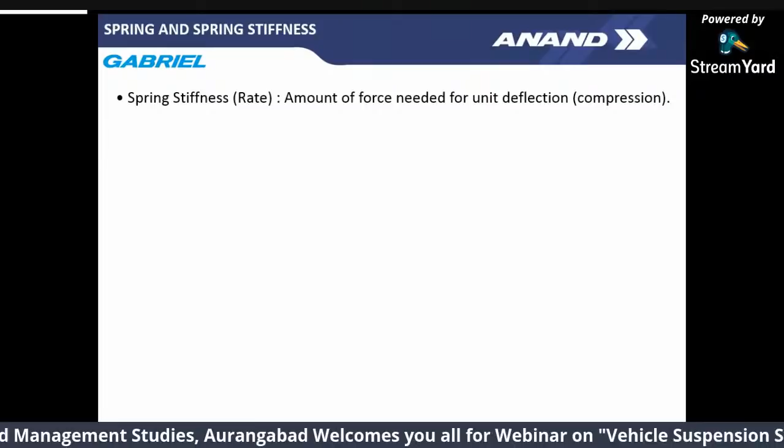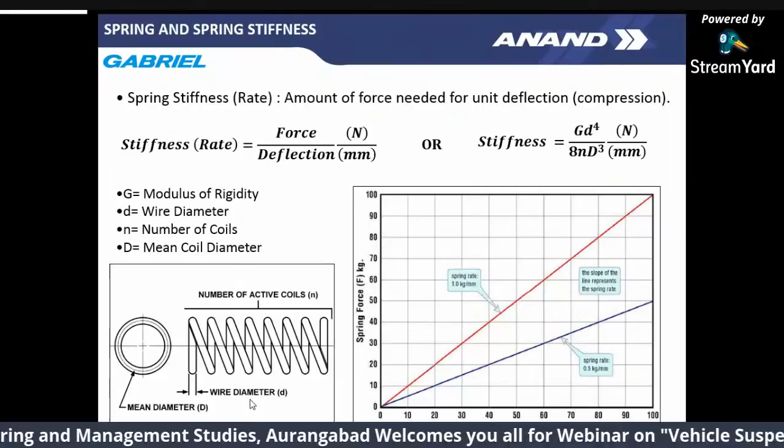What does this spring stiffness variation look like? As you can see in the graph, the blue line at the lower end has a spring rate of 0.5 kg per mm, and the red graph has a spring rate of 1 kg per mm. As the stiffness increases, the slope gets higher and higher, so more force gets absorbed per unit deflection.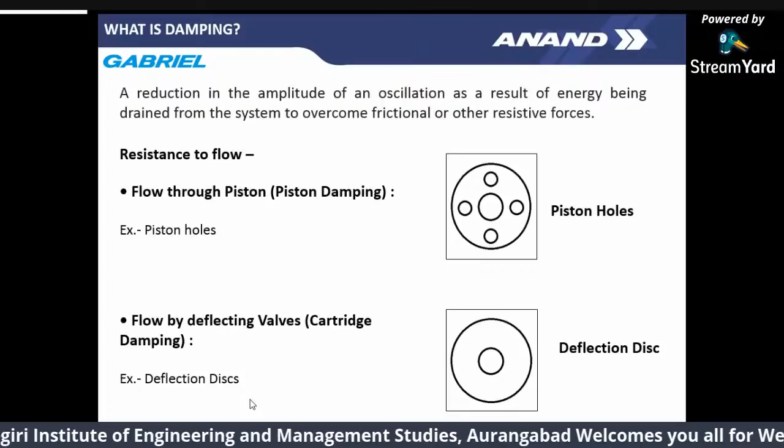The flow happens through this piston. Initially the flow area is equal to the inner tube diameter, and then this flow area is reduced to the diameter of the holes, which causes resistance to the flow. Other than that, the flow happens over deflection discs, which is another factor causing resistance.

I initially explained that kinetic energy gets absorbed in the form of heat energy. How is this parameter exactly measured? We plot a graph of force versus displacement. The damper is given a sinusoidal input of plus or minus x mm, and for this displacement the damping force is captured, producing a potato-shaped curve. The area under this curve represents the amount of energy absorbed by the shock absorber. The portion of the graph above the x-axis is the rebound stroke, and the portion below is the compression stroke.

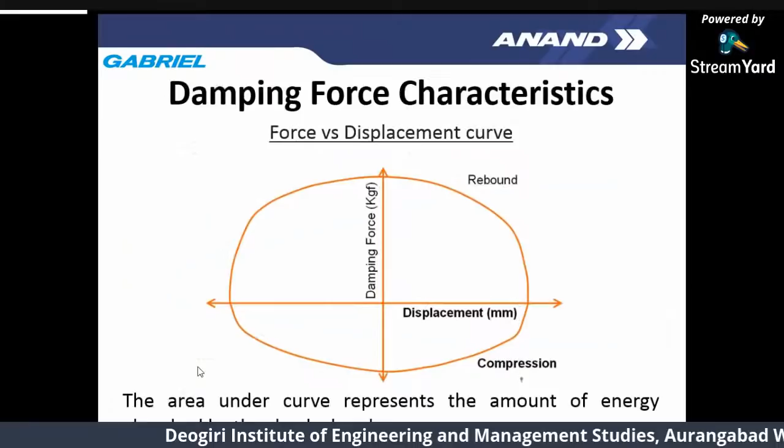Yeah. Ajay, over to you for the gas part.

Thank you, Geetika, for explaining how the damping and spring work in the suspension system. Now I'll move to another topic, an add-on to the suspension system called gas charging. Many of us have myths or misunderstandings about what gas charging can do in a shock absorber. The first question is: why is gas charge required? The straight answer is to avoid cavitation in the damper system. But is that all it does for suspension performance? Not exactly. It reduces cavitation, yes, but it also improves suspension response because there's no lag or bubble formation, which would cause uneven damping.

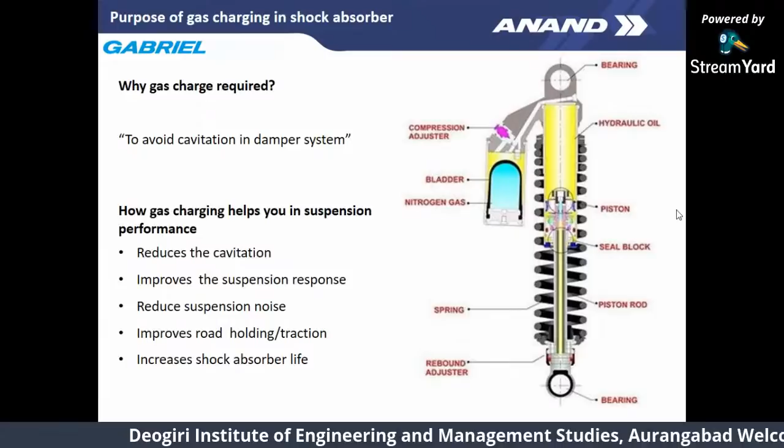This is a typical canister shock absorber construction with gas in a bladder. You can see the nitrogen gas bladder, which supports the compression stroke of the suspension. The rest of the system remains the same as a normal hydraulic suspension.

So this covers the suspension system and its components. Now let's understand the new technologies and the latest updates happening in the suspension industry.

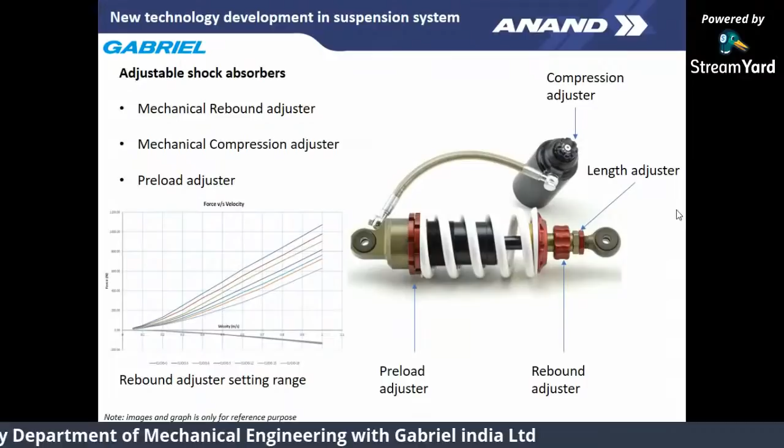To start, let's look at the new adjustable shock absorber, a mechanical adjustable shock absorber—the images shown are for representative purposes. There are many types of adjustments available in the market: mechanical rebound adjuster, compression damping adjuster, preload adjuster, and length adjuster. These are just a few typical examples. The graph at the bottom shows rebound side force versus velocity, and how it varies with the rebound adjuster, giving very low damping to very high damping from the lower setting to the higher setting.

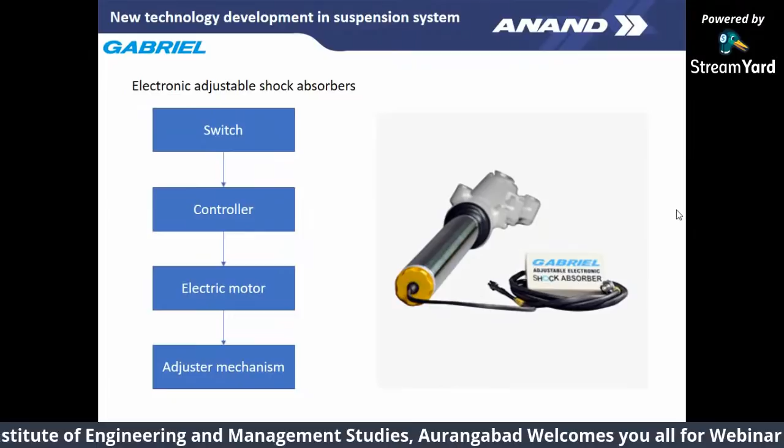That was about mechanical adjustment. Now let's talk about electronic adjustment, because the whole world is moving toward electronics, and as a suspension manufacturer, we cannot survive without incorporating electronics. The other mechanisms remain the same, but a few additional components come into the picture: a switch provides feedback to the controller, and an electrical motor responds to the controller's feedback to adjust the adjuster mechanism. The rest of the adjusting mechanism's construction remains the same; this is just an additional module for any electronic adjustable shock absorber.

Okay, a little more in advance, let us look into the semi-active systems. We often heard about semi-active and active suspension when discussing suspension types. The typical difference is that semi-active suspension deals with controlling only the shock absorber, or simply the damping force, whereas an active system controls the spring system, or has an actuator instead of a spring, along with the damping system.

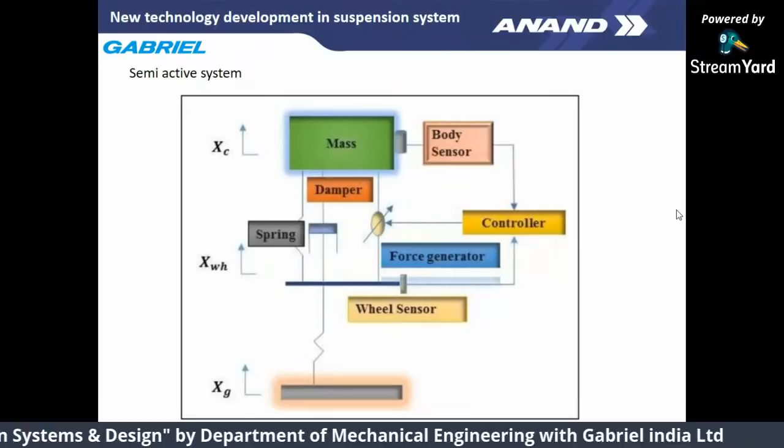As I told you, there are many types of active suspension. Sensors are being used in recent days for visual mapping or image processing, and also accelerometers on the center of gravity using sensors like gyroscopic sensors.

And also, instead of an actuator system, the latest advancement is the electromagnetic suspension straight away. The controller gives direct feedback to the electromagnetic actuators. So instead of a spring and damper, the electromagnetic actuator responds to the controller and gives the exact ride. This is also called a hook type suspension, or sky hook type suspension.

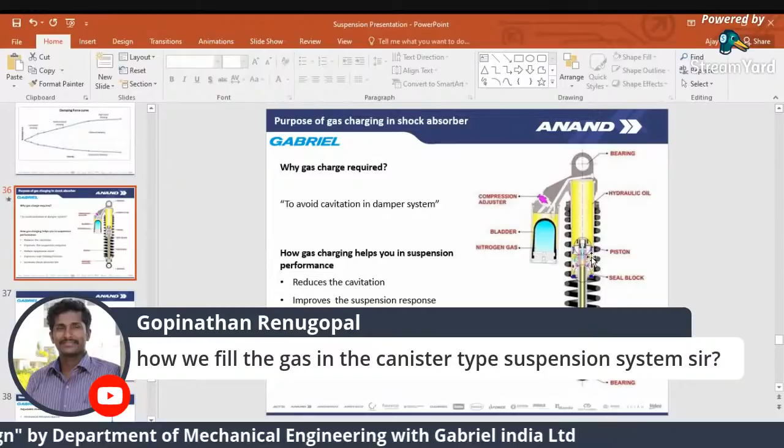As you can see, the bladder and nitrogen gas is mentioned on this image, and just below the nitrogen gas there is a cap. The cap is having a valve called a non-return valve. It's a kind of rubber piece; you can puncture the rubber and fill the gas into that. Once you remove the needle out of it, the gas will not leak. This is only one type of gas filling; generally nitrogen gases are filled with valves only, and there are multiple types of valves available across the industry. This type generally uses a rubber valve and you puncture it, similar to how you fill air into a football bladder.

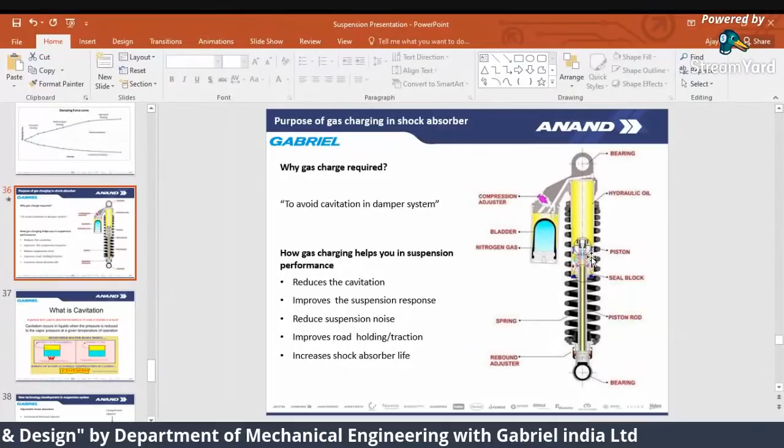Next question is for Geetika ma'am: Geetika ma'am, how to plot force and velocity graph while designing dampers?

While designing dampers, you cannot plot a force versus velocity graph. That is an output of testing. You can design it for a particular force versus velocity graph, but that is based on your previous experience and knowledge. For example, at Gabriel we have multiple applications, and if we are developing a new application taking reference from some old application, then we already have set values. But if you are somebody from a Baja or Supra background, then you will have to get it tested.

I will add some aspects into that. When you talk about force versus velocity, it's basically how it responds to frequency. It's a deeper topic, and we will not go to that depth, but I'll give you a broad view. The road frequencies are generally on the lower side, and there will be high frequency input also coming from the road. So when you plot road frequency versus transmissibility, you get a changeover point from where the low frequency transitions to high frequency. The lower frequency is considered for lower damping, and higher frequency for higher damping. The changeover point can be designed from the vehicle dynamics point of view, and then we define the damping ratio requirement for lower velocities or lower frequencies and higher frequencies. It's a very complicated topic, but I'm just giving a broad view.